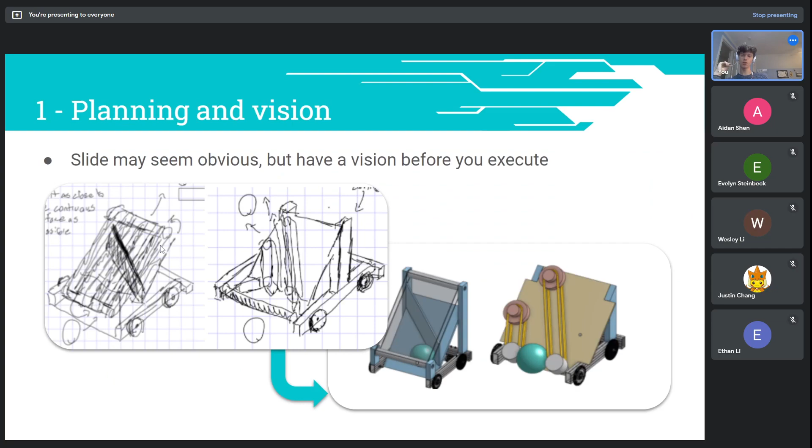This ramp might have been an example of that, although it's really just a rectangle, but it's a rectangle mounted at a really weird angle. You'd need some 3D printed brackets. But overall, you should be checking for design viability and manufacturability. And then you can also rapidly test and iterate lots of designs. So the nice thing about Crayola CAD, it's sort of one step above sketching, where you can crank out an idea really fast.

I've gotten good enough at Crayola CAD that something like this would take me maybe 20, 30 minutes. So you can do that, give it to somebody, and then they have a 3D representation of what they're doing. You have some dimensional constraints. This wheel is 90 millimeters because I knew whatever wheel we used would be 90 millimeters, and I wanted that size to be accurate. The ball's 6 inches. And this drive base is accurate because it was already CADed. All I had to do was delete this front rail, and we were good.

But Crayola CAD can be basic or advanced, and there's a couple steps in it. So this is Crayola CAD for our 2020 online robot, and we had this intake here. This intake would pick up a ball. This red belt would sort the balls, push them forward, and this ramp would hold them. You had to hold 5 balls, and then this shooter shot them out.

You can see here, it's not quite Crayola CAD, but it is concept CAD, where the wheels here are blocky shapes, and these flapper wheels, they're not real parts. And then this motor is just mocked up. It's a rectangular prism in a circle. These plates are clear, so you can see what's going on in there.

There's stages of doing CAD in levels of detail and planning, and you don't always need detail. You could probably manufacture a robot from this. The robot would have a lot of jank to it because it would be mechanical members figuring out stuff on the fly, and that's always going to be janky. But you could also do something off of this, and it would be slightly less janky. And then you could do something off of the real CAD this year, where every bolt, nut, and screw was CADed, and then the robot is actually going to be fairly well put together.

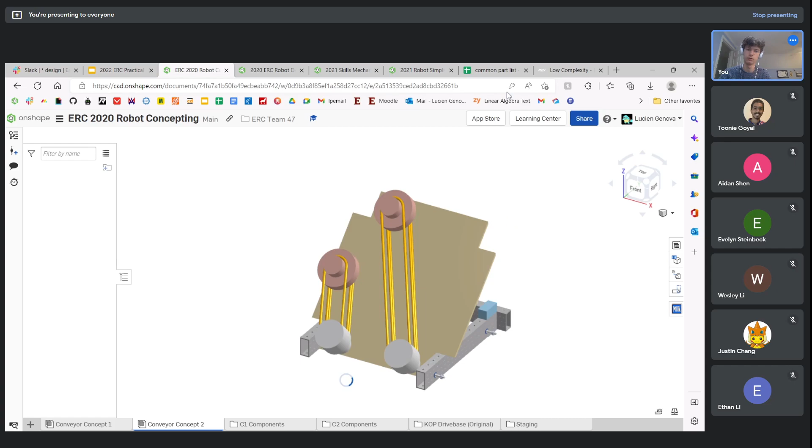Asking for a lot from Onshape right now, but it's doing all right. So you can see here that this is a really simple concept, right? There's like 3 structure parts, these 2x1 tubes, which mount to the side of this plywood board. And in CAD, always, always, always make things the color of the material they're actually going to be. Actually, not always, always, always.

These are blue, but the wood board was very important to me because a big flat piece like this can be made out of several materials. You can make it out of metal or polycarb, but wood was best because it's cheapest and you can screw into the side here, so you don't need like a bracket if you can just put a wood screw straight in here.

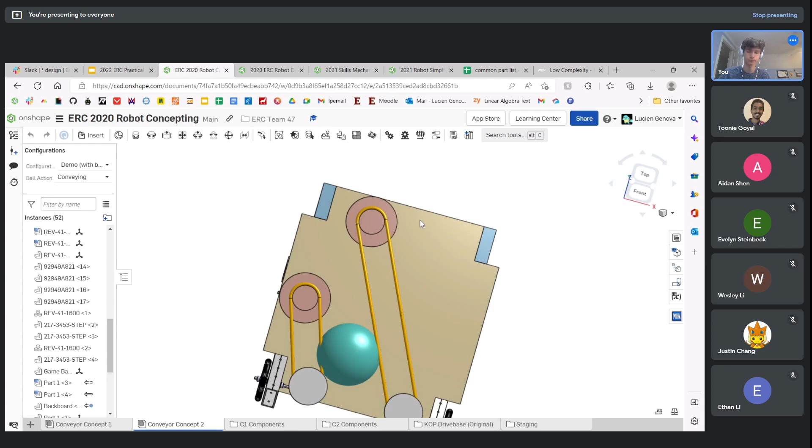And we actually wound up going with thicker plywood on the real design than this, which is just, if I click this here and the back there, this is just 1/4 inch. We wound up going with like 3/8 inch plywood. So we probably could have done 1/4 inch. And this doesn't have any motors in it either. You know, the viability test wasn't that big of a viability test, but I mated this ball to the surface so that it runs up and down the conveyor.

And I actually have a cool little configuration panel where it'll choose the ball action, whether it's intaking, which sets it planar to the floor, whether it's conveying, which sets it planar to this, or whether it's shooting, which puts it on a linear path. You can see the shooting puts it on a linear path that goes out the side. So it only ever goes like this. And then if I put this as intaking, it'll go to the floor. So having easy testing and visualization in your CAD is also important. And this is one of the aspects of that.

You can see with the second conveyor concept, I didn't really do this one as much. This was Kevin and Reese. Can't remember who was working on this. But yeah, the ball comes up. You can see there's a good amount of interference between the ball and the belt, and you want that because the belt is stretchy and compliant, and you want the ball to come up through it.

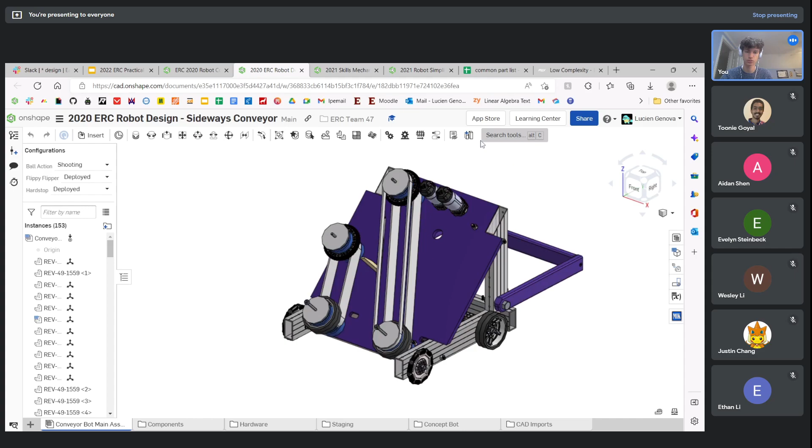Now, if we look at this 2020 ERC robot design, this is the more in-depth version of this Crayola CAD, and you can see that this has all the bells and whistles. I mean, it's got hardware. It's got screws to show you where the main board is held in place right here. See, it's got chains. These motors are bolted to this board, and it's got sprockets on the end of those motor shafts. This is 5mm hex coming out of that motor, and the sprocket is on the end of that.

And you don't need a bearing for this because the motors have internal bearings. Unless the shaft is like super long, then you should support it on the other end with a bearing. But these chains go down to the sprockets that drive. There's one that drives this one, and there's one that drives this one. Now, I figured you could do it with a geared reduction, but there were two things here. I didn't want to waste, or I didn't see the need for another motor slot. You only got 2 additional motors this year. Now it's up to like 3, I think.

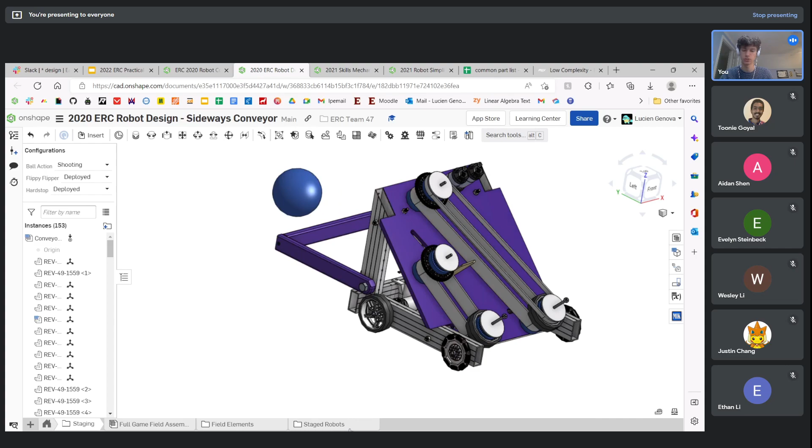But I didn't see the need to use a motor anywhere else, and so I was like, give me more power. It'll make the shooter work better. But also, I figured that tuning the speeds between these two might be useful if you wanted to change where the shot usually went. So we had this hard stop at the back, and that would put us against the wall a certain distance that I calculated the ball would go into the goal. So that distance was like the ball will go into the goal anywhere if it's next to it up to 2 feet away. And you can actually see in the staging, I put the robot on the field, see if this loads.

I put the robot on the field and checked it up against the different game elements. And the field CAD is public, by the way. So I highly encourage you to do this because it's a really, really easy way to check functionality without actually having to build a field. That's what CAD is so good for.

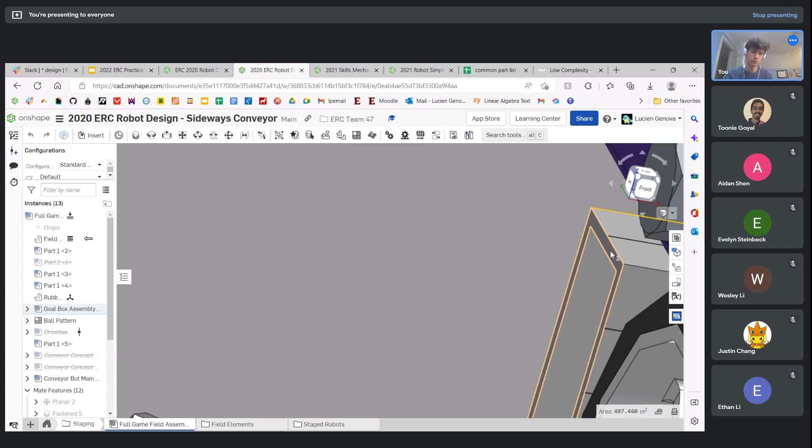You can see there's a back wall here. This goes up against the wall like this, and then this is launched straight from here. You can see that's just about hitting the top there. So I calculated this was the farthest distance it could shoot from, and that distance is 2 feet. Now, I figured it would shoot from farther than this because of the effects of gravity that's going to pull that ball down. So it would wind up hitting the far edge of that circle and not the top.

Oh, and you can also see this one has flappers. They're not properly constrained to the wheel, but you can see this is a bunch of stacked 3D printed parts, and the zip tie just goes in there like that. These flappers were zip ties with weights duct taped to the end of them, and it was super sketchy. Do not get your shins near that. But they did work very well, and it meant that we didn't need a ground intake. For this year's cube, flappers like this may not work because they're heavier and they're not a circle, but I'll let you guys decide that.

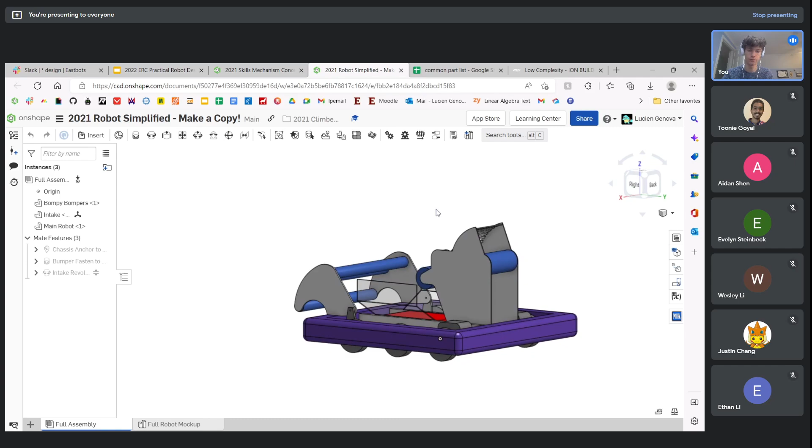And then here's the simplified robot from 2021. You can see we have our shooter and our intake. Drive base gearbox is represented. Now, I'll let you in on a little secret. This Crayola CAD wasn't actually made before the actual robot. The one I'm about to show you was the original concept CAD. This was made afterwards because I wanted a simple platform to build new mechanisms on.

So we were going to maybe do a climber, and I wanted to see where you could fit that climber. I decided if you have two climber tubes, you could fit them here and here. Although that's a little difficult because there are chains here, and I didn't mock up the chains in this mock-up, so you can see there's sometimes a limitation there. But this intake rotated. None of the other big things moved, but it was a good mock-up. And then this looks complex, but if you isolate any subsystem, it's really not that bad.

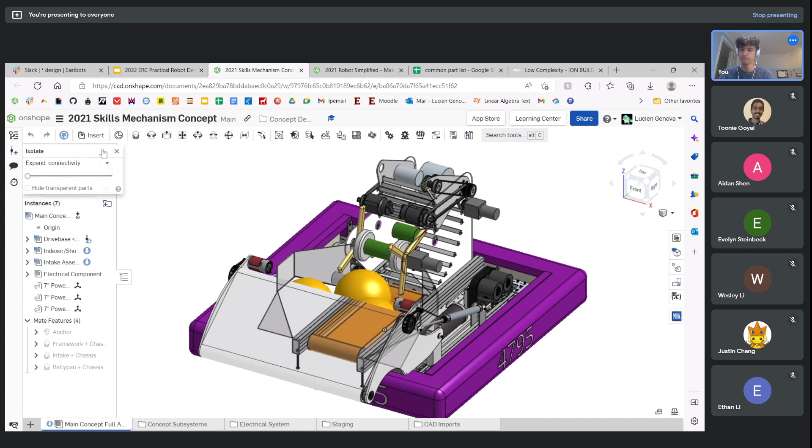Look at the indexer and shooter here. You can see we have this nested rotating hood, and that's just made of two side plates and some shafts. There's actually not even any shafts in here. This wheel was just mocked up as floating because I figured the shafts would be the difficult part. And then you've got these belts that go up here that drive this top wheel, and down here you've got a motor to run the wheel that brings the balls into the shooter, and then there was a motor here to run this conveyor belt.

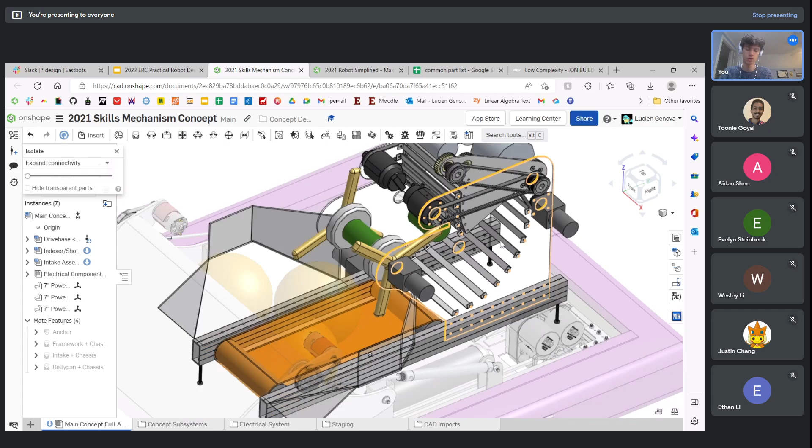And then these parts were a fun part to make. It just looks like that. I figured we were going to make it out of bent polycarbonate, and you can do something interesting in Onshape called sheet metal design, where you design this as a sheet metal part, and it'll generate a flat pattern. So that's the pattern you have to cut out, and it'll tell you what bends to make to make it look like that 3D shape. But explore that on your own. I'm not going to teach it today.

Oh, and you might have heard the story of the 88 rivets that I did. That was for all of these backing plates here. So, does anyone have any questions so far about the Crayola CAD process?

Sweet, okay. So let's go next to the COTS CAD and imports. So I showed you this design here. You can't just get parts anywhere. There's actually a set list of parts that are legal for this activity. Assume that if they're FRC or FTC legal, then they're legal for ERC.

The extreme take is that every nut, bolt, and gusset is represented in CAD. You don't always need that, but it's good to have actual products in your CAD because you have to know how you can machine them, and how they can actually be made and if you can actually make them. So the main site you're going to use for this activity is Rev Robotics. It's what supplies the HD hex motors here. Great little motor, great little gearbox.

West Coast Products works with VexPro a lot, and they develop similar products. They're for FRC mostly, but if you need wheels or tube stock, aluminum tubing, or sheet polycarbonate, West Coast Products and VexPro are great solutions. VexPro also has some motors, but I would encourage y'all to use Rev Robotics motors just because we have those and we're happy to order more. VexPro motors are way more expensive too.

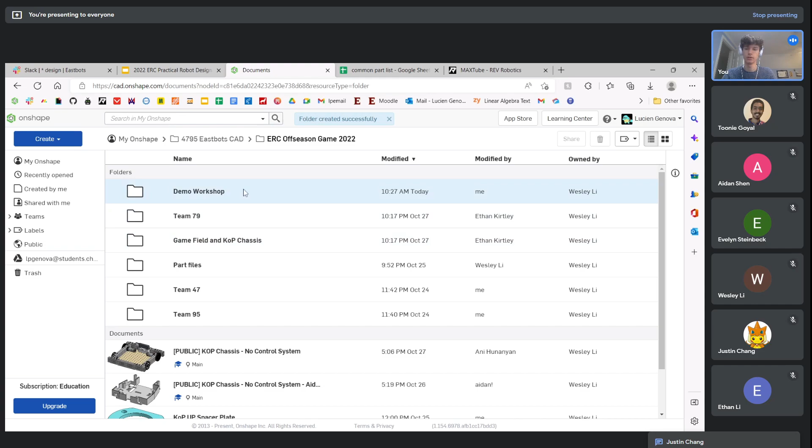I'll make a new folder. Shop. Okay, you all downloaded MKCAD. MKCAD is great. It's mostly FRC parts, which is problematic. Import example. So there's some FTC parts in MKCAD, but it was made for FRC. I think MKCAD was in the curriculum for y'all.

Hold on, I just didn't say what I did. So I'm in a Part Studio here. I'm gonna press this plus and click import. And now I can go in my downloads, select this file, and combine it to a single Part Studio. It's just one part, so that should be fine. But if you're downloading a wheel, sometimes the tread of the wheel and the body of the wheel are 2 parts. So you want to combine it to one Part Studio, because then you can make it a composite part or something, make it easier to work with.

I'm gonna find myself a little wheel here. Let's go with a traction wheel. Actually, no, the 90mm grip wheel looks cooler. So we're gonna do that. And I'm gonna download it. How do you get different imports into one Part Studio? Very simple. I'll show you. So delete all here. Here's our import.

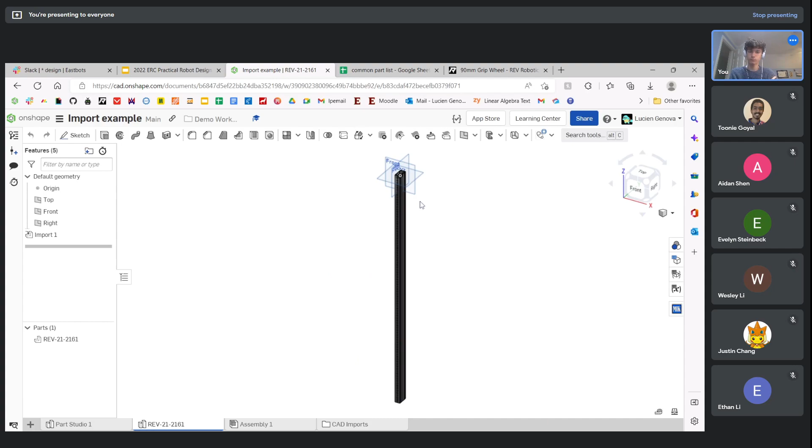Let's cut it down to length. What length do we want this to be? Let's just make this a drive rail. I'm gonna click this face, Shift E to extrude it. Then I'm gonna go remove, up to face, and then offset distance, and that's the length that the tube is gonna be, which will be 13 if it's a side drive rail. And I'll click this face, and it should cut it. There we go. So that's the length I've got here. And I'm going to import my other item here.

You can see it's clearly in my files elsewhere, and this is where I'm going to want to combine it to a single Part Studio because it would just populate a bunch of Part Studios. And also, if you go to CAD imports here, this is the raw file. Onshape has to process that into a real file.

So I'm going to name this Part Studio Rail Mock Up. Let's see, is it importing? We're going to do something called a derived part, and that's how you get other parts into Part Studios. And you can actually derive parts from MKCAD, which we'll do in a second. So derived part is in your part menu down here, in this whole menu.

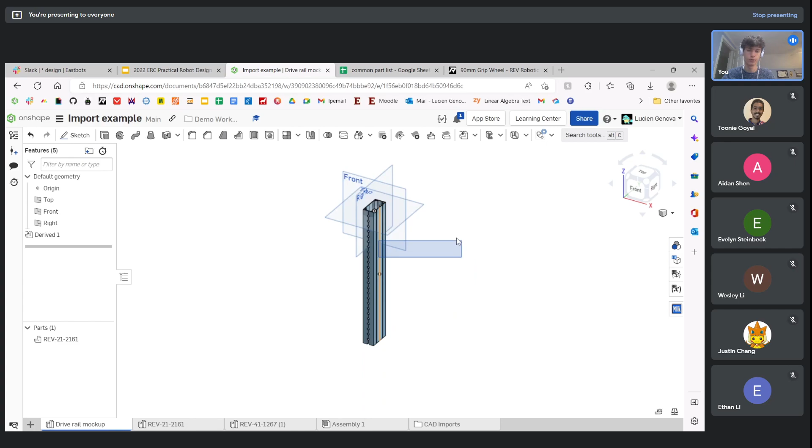It's right here. So I'm going to derive this. Actually, I'll derive both. Yeah, I'll derive this. And that'll bring that in here. And now I have this in here, but look, I can't move it around at all. That's sort of annoying. So I'm going to do something called a transform. If I click on this part, and then I say transform by mate connectors, it's basically a mate.

So I can go ahead and put this on the middle, to be honest. And then I'm going to click the origin, sorry. And that will make it go like this. And I think, yeah, that's about how I want it to be. So that's good. And then you can add offsets to that if you want.

If you go in this transform and you click on the details for each of these mate connectors, I can maybe offset it so that it's 0.5 over, minus 0.5, so that it's centered on the origin. And now I have my part here, and you can see I still can't move it, but it's transformed to a nice place. And I'm going to edit the appearance so that it's silver, because that way you know it's metal. There's no question about it.

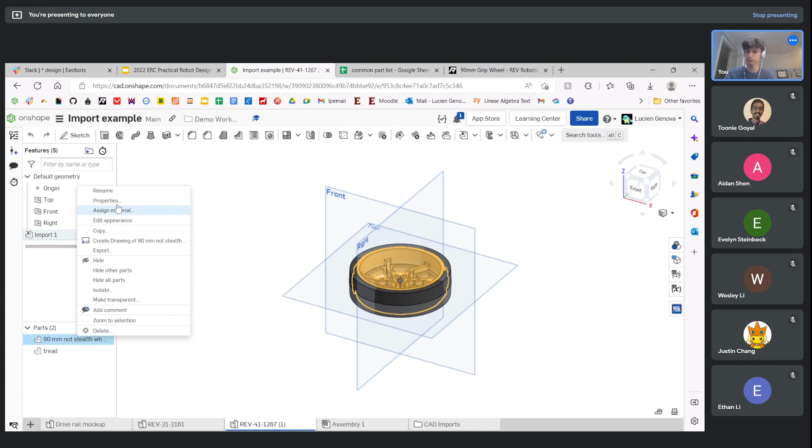Now we got our wheel, and you can see here, what's really interesting is that there's going to be 2 parts at the bottom here. You have your tread, and it's cool because these parts are bonded in real life.

Oh, it's Ryan Huang. It's cool because these parts are bonded in real life, and you can see how they're bonded. So this just has these flaps here, and then this tread is overmolded. Like that, and it just sort of slides in there. You can see it's got these back things. So pretty neat. It's just like the tread material is poured as a liquid around the wheel, and then it sets.

But if I import this into an assembly, it's just two parts, and they're not constrained to one another. So if I do this, it's not really useful, and I don't want to have to click this and group every time I want to make a wheel that works. That's a lot of work, and I shouldn't be expected to do that.

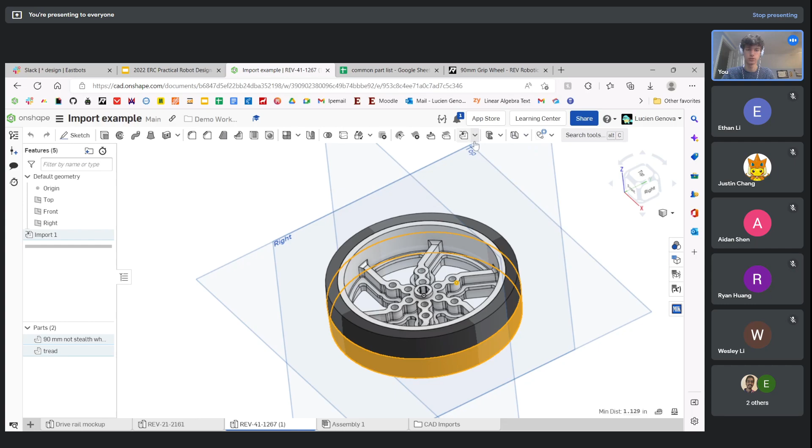So I'm going to click both of these parts. I'm going to click down here. No, it's this one, composite part, and that will just turn them into one part. Boom. And you can have it so that it keeps the old parts if you don't click closed. If you do click closed, it'll maintain everything. And then, well, I got rid of the old things.

I might actually go into this composite part thing here, and I'm gonna unclick close. That way it keeps the old stuff. So this should be still around, but if we go here and we click visibility for composite parts and we drop this down, you can see composite part 1 is right in there.

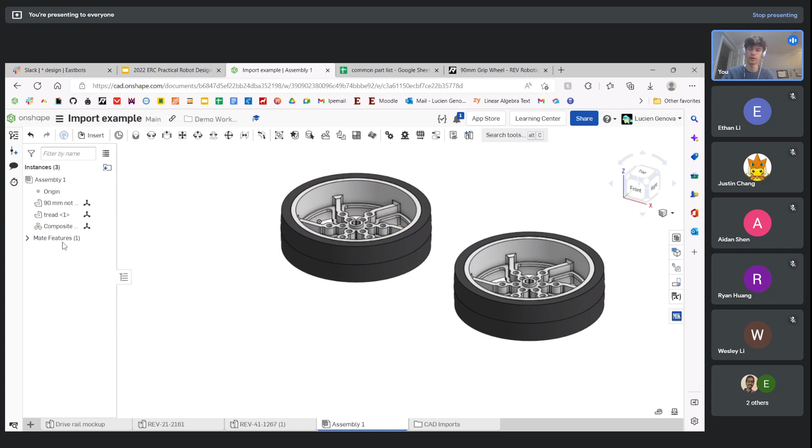And so now this moves on its own. This won't move on its own if I delete group 1 here. Actually, I'll right click it and just press suppress. But this still will. Anyway, maybe I spent too much time demonstrating that, but it's very useful.

So I'm going to make a quick hole in this part. I just clicked Shift S there, N for normal, and I'm going to make myself a little circle. The thing about VersaFrame and MaxTube is that you really want to make a line like this, because if you look, the center that it will snap to is actually one of these edges, and that's not centered. So I'm going to make a point here.

Actually, I'm just going to make a line that goes across, make it a construction line, and I'll just make it super long. I'm going to go down here so it doesn't snap to anything, and then I'm going to click it and press H for horizontal. And then I'm going to make myself a little circle here, on this line. Actually, I'll just make it on the end point here. That's easier to snap to.

Why does it have the grooves? It's so that when you're machining it, you can just punch right into a hole, and it'll make sure that the hole is in the middle, half-inch offset from the right or half-inch offset from the left. So it's a machining aid. Makes CAD more annoying, but it makes machining better, and so that's why we use it.

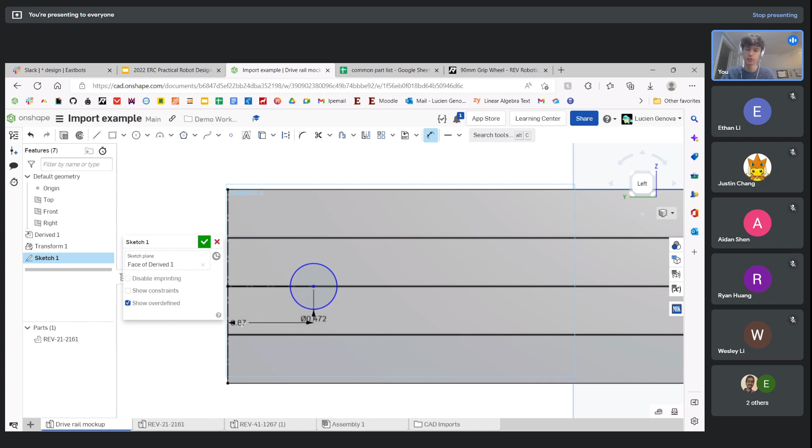And I'm going to dimension this to, did I already say 12 mil? I did. When did I do that? I don't remember doing that. Okay, I'm going to go from the edge here. I'm going to make it just away from the edge, and I'll extrude that. Okay, so there's my hole.

And if we look at this part, let's go back to our slideshow here. This is the same workflow we just went through. Now, this slide initially came from a lesson for FRC design, so it used Vex Pro VersaFrame. You can use VersaFrame for this anyway, but Rev MaxTube is a new product, and it still works. So you can see the full length thing imports, then you cut it down to length, sketch a hole, and cut that hole through it.

And then I actually made this GIF set showing the machining steps you would need to actually achieve this. So you cut it, put it in the vise, run it through with the portaband, that gets it here. And then you mark your hole and you drill it, and that gets it to here. So it's two pretty simple machining steps. It's important to consider the machinability of your parts when you're doing this. Because if you don't have machinable parts, your design can't be executed, and it's very important.

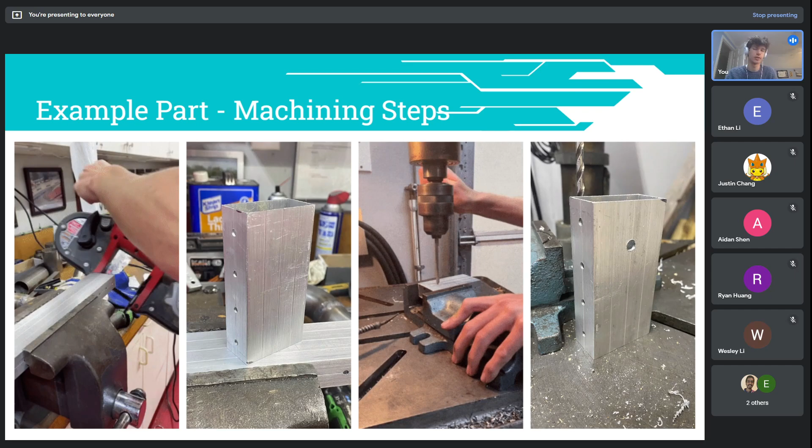So I was going to maybe do a little bit more deriving and importing and stuff, but I feel like you guys get the picture. If I take this into the assembly, I'm going to make a new assembly. Oh, and here's another cool thing. If you have something that you would like to be the face of your document, right click this and say select as document thumbnail, because it just does it randomly if you don't select an explicit one.

And I'll put the parts from drive rail mockup, and I'll put the composite part I had here, composite part 1. I very rarely fix things. I don't know how Wesley showed you to constrain parts. Usually what I do is I'll click some center point, and then I'll click the origin, and I'll do what I call an anchor, where I mate it to the origin. And that way I know where everything is, and I'll just name this anchor. And now this isn't going anywhere.

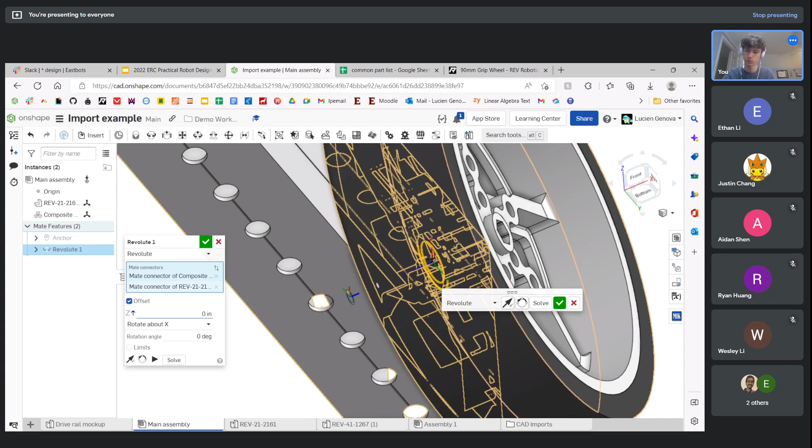And then I'll do a quick little revolute mate, maybe with an offset, this edge here. Other way. It seems like there's a 50% chance you'd get that wrong, but I find it actually happens every time. So at least 75%. And you can see that mates this to here. It's just a very crude example, but I wanted to show some more common practice things. This is probably redundant to what Wesley's already showed you.

Now we get into the design process, and this is one of my favorite slides coming up here, so get ready for it. We have all these things, right? These are the different steps of the design process. And I'm going to talk to you about how CAD interfaces with that. So starting off with the problem, you have to identify specific tasks that you can do. And you guys already did that. That's looking at the game field, deciding what points there are.

And this is, even before you decide what you can do, you decide what you want to do. That's very, very early. This is what you do on kickoff. You do very little of this and mostly this on kickoff, everything that you can possibly do, how matches will play out. And then you decide based on that, what weight do you want to give certain tasks? That's where you make your spreadsheets.

You don't really want to start making sketches here, but you may want to make sketches just to test the viability of certain ideas, because it's impossible to actually think of the difficulty of a task completely agnostic of the difficulty of making a mechanism for that task.

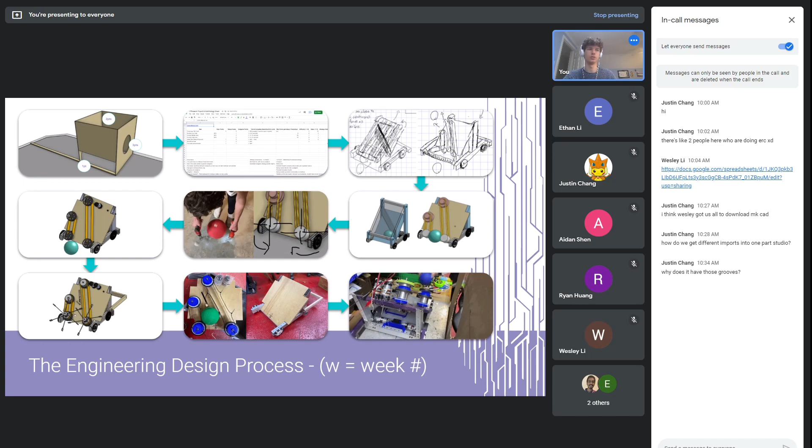Why does it have those grooves? Was that asked just now? No, it wasn't. Sorry, Justin. Oh, I answered that. I did not. Yeah, okay. No questions about this slide.

Okay, sweet. Let's talk about design review. You'll present your ideas to experienced CAD members, and then you'll get some feedback and revisions. We're going to look at a couple things. DFM, which is design for manufacturing. DFA, which is design for assembly. So are all the bolts accessible? Can everything be held together? DFS, which is design for service. That's an offshoot of DFA, which is like if your design breaks, how easy is it to fix?

Because if you're at the competition and you break, that should not be the end of the competition for you. It should not limit what you're going to do for the rest of the event. So design clever ways that you can hot swap things. We also want to do a cost estimate. So is this design going to be wildly over expensive? And then some major optimizations, like removing certain features, adding motors, things like that.

And then minor optimizations, like, okay, this hole looks a little bit too big. Make sure your tolerance is good here for this bolt. You want the hole to be a little bit loose fit, so that it doesn't rub with a shaft, or maybe you want to pick a different wheel. Maybe you want to use a different type of belt. So these are what we'll cover in the design review.

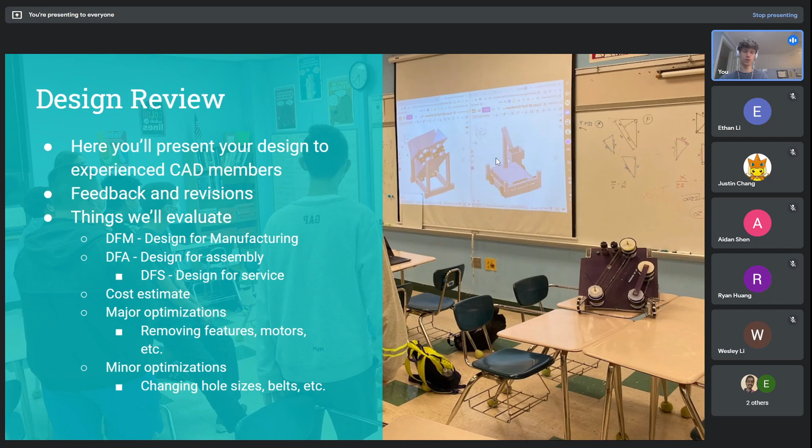And we had this whole thing up on a projector. We had a robot here for reference. It was pretty cool. So now let's talk about the nitty gritty. I've gone through a little bit of this so far, and this is the tail end of the workshop. There's 2 slides left. The nitty gritty is as follows. You have your structure and components, and this is pretty rigid. This is sort of what you have to stick to.

So tube construction, sheet construction, and superstructures and mechanism frames are things I want to talk about. You can't really make anything you want, contrary to popular belief. Your limit is not your imagination, it's what you can buy. Now you can imagine a lot of things based on what you can buy, but these mock-ups here, this was the Team 47 CAD from last year. This was the final CAD.

You can see that it doesn't have full off-the-shelf imports. It didn't need them. The mechanical members were smart enough to figure out, okay, we need 4 bolt holes at the bottom here to bolt it onto the back rail here, and these H-frames here for structural stability need to be bolted through the rear.

So that's great. We're going to look at this robot in a second, and it also has some other cool examples of structure that I want to highlight because it did a very good job making sort of a complex system very frugally. So we're going to look at that. But yeah, you have this 2x1 piece of tubing, and then you can see there's a little hole in here, and that's for a 12mm bearing, which is for 5mm hex shaft.

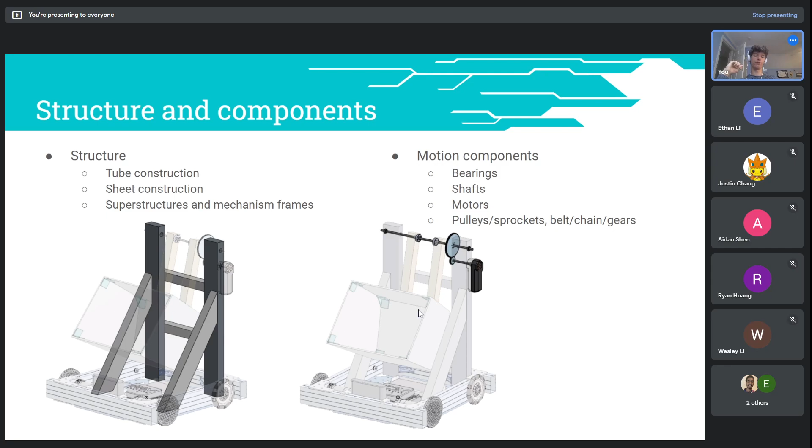So yeah, this motor mounts here, it spins this, which spins this, and then the linear motion is the belt that runs along this. This example is another example of doing work with a motor, right? You have this motor, which is geared down so that this arm spins pretty slowly but very strong, very accurate to position. And then it just rotates this rotary arm. That's another example of doing work with a motor.

That's the end of my slideshow. Do y'all have questions specifically pertaining to your CAD projects? And do you want me to go through a very quick design process of like sketch to CAD?

I think the sketch to CAD would be helpful. Okay. Any other votes for sketch to CAD? Yeah, same. Okay, let me get my sketch pad out. Well, this is actually, I drew this concept during math class the other day. It's for a belt only elevator. And I'm wondering if we should CAD that. Probably not today. But let's go.

I'm going to do a CAD concept for ERC last year. So ERC last year had to actuate a ball. And let's do a pretty simple concept. Set up a document camera here. Let me just join the meeting on my phone pointed at the ground.

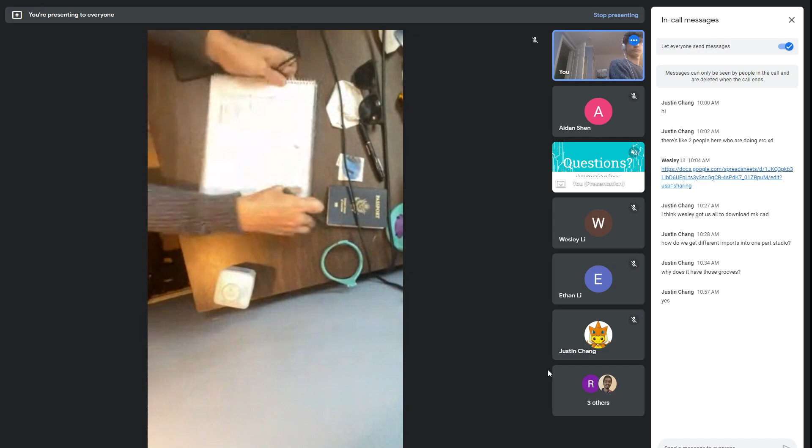We'll keep going with this mechanism concept. If you think about it, the edge of a pulley, like this edge, moves up and down too, and it's not flopping around really that much. A belt is pretty strong, so if we have this pulley, it should be pretty strong.

I'm going to draw a pulley up here, pulley down here, and then I'll do the same on this side. Let's say this is going to be a mid-goal elevator, because you need to do a 2-stage elevator if you're going to go for the high goal. So we're just going to go mid-goal. These pulleys will have a belt that comes off of them. Assume they're the same size; in real life these ones are, but the ones on the right aren't.

Then let's design a little clamping mechanism to clamp onto this, and this center carriage that's going to run up and down. This clamps onto here. You can't see these tiny arrows I'm drawing, but we've got a carriage, and then maybe some kind of very simple intake, like this. I'll just mock that up when we're doing it. Maybe the circles would be on the top and the bottom, and those are wheels.

It's important to also think about where motors might be. Usually when I'm sketching I don't think about motors, but it's sometimes important, especially in a complex scenario. These pulleys have to spin opposite directions, and I think the best way to do that is an infinity belt. Super simple concept, we have it on our robot this year. I think we can put the motor behind this right here. This will be our motor, I just colored it in black.

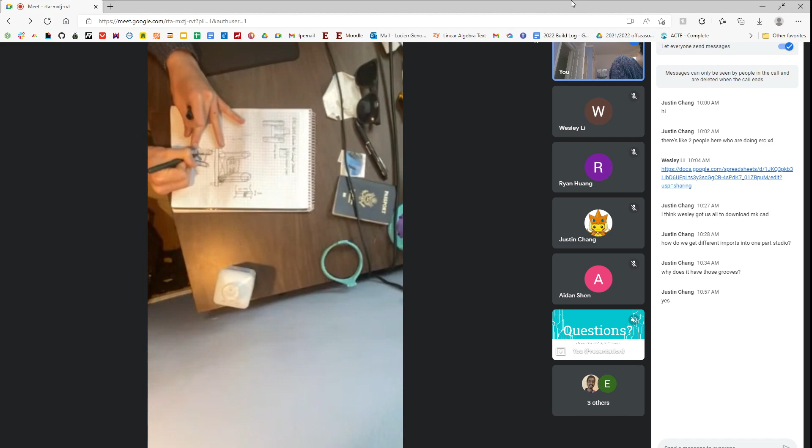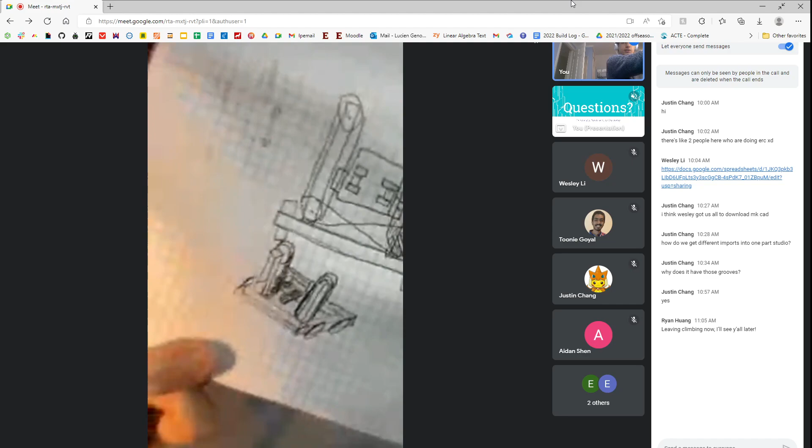I'm going with a wheeled intake because I've been a fan of that since day one. Here I've got my carriage with a wheeled intake on it, and I'll finish this off with a back rail. Our wheels are here and here. I'll do some shading on the fronts of the wheels to give them depth. So that's the robot concept sketch. It may be difficult to see, but it'll be much easier to understand in 3D, so let's do that now.

I'm going to kick this fool from the meeting right now. Actually, I'm just going to unpin his presentation. Okay.

So now it's time for CAD. I've got my import example here. I'm going back to Onshape, demo workshop, elevator example. You guys may not be able to do this; I don't think you will have permission to import from other documents.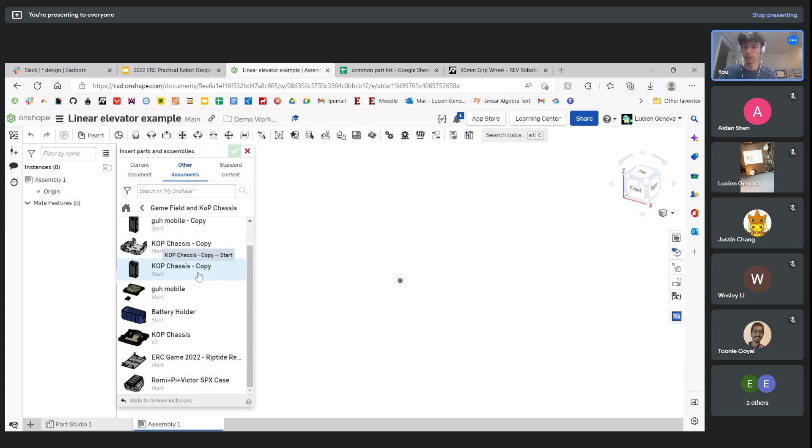You go to My Onshape. This is super useful, but I heard some of you didn't have perms. You'd search game field and KOP chassis, then click KOP chassis. It's been versioned; create a new version every time you want to import it. Then we go to assemblies, and I think it's full assembly.

And we'll wait for this to load for a second. Now the thing about Onshape and multi-document interaction is that with multiple documents, you need to version it every time you make a change in the other document. Okay, so that imported that. Great. I'm going to anchor it because right now it moves around freely.

So we're going to press mate, and I'm just going to use the bottom of the belly pan centered here. And I'm going to click the origin mate connector. And I'm going to call this anchor. So now this won't move around. And then I'm going to name this full assembly. Should have also said full assembly, but you know.

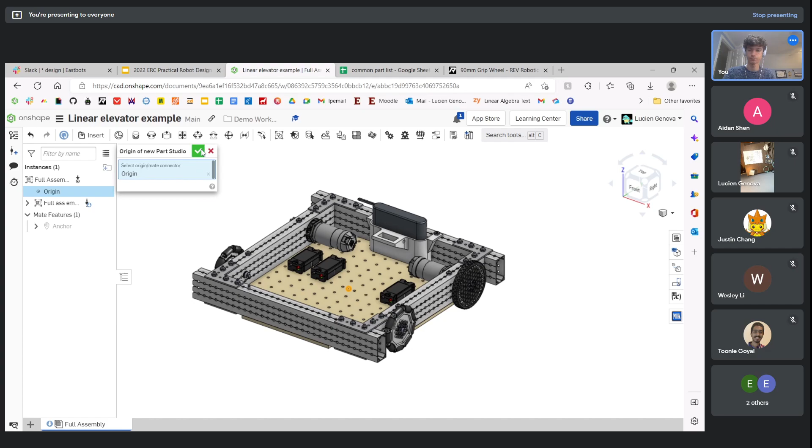And we've got our mechanism. So I'm actually gonna delete this Part Studio. I'm gonna show you something cool. If we go up to the top here and click Create Part Studio in Context, and then we select Origin Mate Connector, it brings us to a new Part Studio that's in the context of the assembly. This is super useful for rapid prototyping.

You have to be careful with context though, because let's say I make a sketch. If I click this and make a sketch on this, and I use my project tool here to bring a bunch of these existing geometries into the sketch. I can bring geometries that are on the plane, or I can actually bring this line here onto there. If I finish that sketch, we have our context, right?

It's in context. But let's say I go to this assembly and I delete that belly pan. All of a sudden, the whole Part Studio breaks. So you have to be very careful when you're doing this because, well, it's great for a demo concept, you want to avoid context when you're doing actual mechanism CAD. I'll say that.

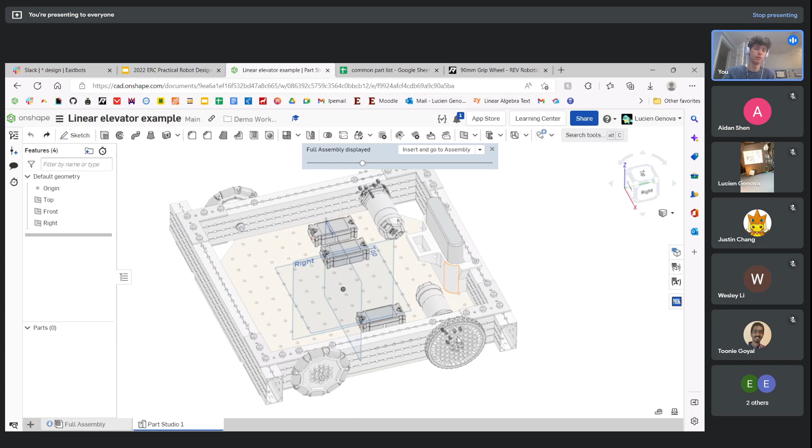So we have our initial. Which side do we want to be the front of the robot? Yeah, we want most of the weight to be over the front two wheels because then it won't wheelie. If we put the elevator over the back two wheels, plus there's less room here, it can drive these so it'll wheelie. Here it'll just slip the front wheels more often. So that's a quick design decision we'll make.

And I can go ahead and just start a sketch here. I'm going to say upright 1. I'm going to name this sketch uprights. Yeah, that is poorly done. And we'll go ahead and project this bit here, right there. And we'll go ahead and make ourselves a 2x1. I clicked G there to make myself a 2x1.

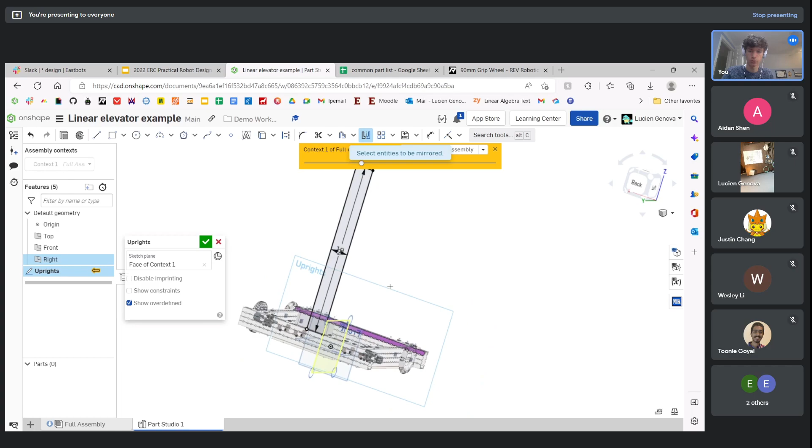And then, how tall should it be? The frame height limit is 20. Let's take off an inch for that, so 19. So now we have our thing here, and I'm going to do some quick sketch prototyping, actually. Hold on, give me 1 second to mirror this. I'm going to mirror it about the middle plane here, and I'm just going to select all here. I'll click this and this too. Okay.

Now let's make ourselves a little rectangle here, and let's constrain the height of this. Hold on, I'm going to make this a construction geometry. Just pressing Q and G does the trick there. And then I'm going to make this like 4 inches tall. If you think about it, the taller this is, the more stable it will be on the belts, but also the less travel you have because you reach the top sooner. Right, so we can play with that.

And this can move up and down in the sketch here. And I want to represent our goal. How high is the goal? Do any of you guys know off the top of your head how high the mid goal is? 10 inches. Is it? Yes, 10 inches. And high is 20. Okay, sounds good. So we're gonna make ourselves another quick thing here.

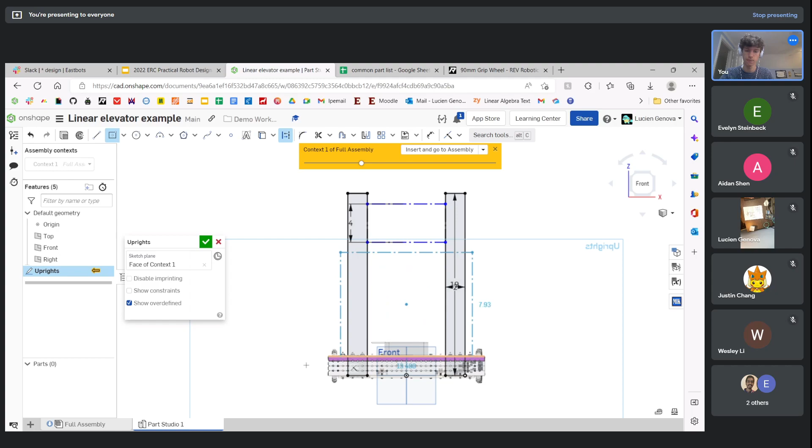And I'm going to dimension it from the origin at the bottom so that it's on the ground where the wheels are. And sketch prototyping like this is also a very good way to, see, it's like 0.75 if I recall correctly. Something like that, yeah, okay. And 10 inches tall.

So what I'm seeing here is that we honestly don't need all this reach, although it might be nice if we're stacking later. So I think probably 4 inches is fine. We might even want to go up to 5 or 6. Or we could do little extensions here. But this was just to test the viability of this geometry and see, okay, can we make these shorter?

Maybe we make them both 18. Or maybe we make them 16. Right? And then that can still reach here. It can still dump into the box. Just going to dimension the bottom here. It's bothering me. I think it's 24 wide.

But I think we'll just make it 19 because not going right up to the frame height limit gives you some room to breathe. And let's do a quick dimension here. This from the bottom of the floor here is 19.75. That's going to become a driven dimension, 19.75. And that tells you the legality. So if we go 18 here, it's 18.75.

The tallest we could do is 19.25. But we don't want to push it that much, really, because you would hate to get called at inspection because of something like that. You want to optimize, but you don't want to give yourself future risks. So I'm happy with the way this driven dimension is right now.

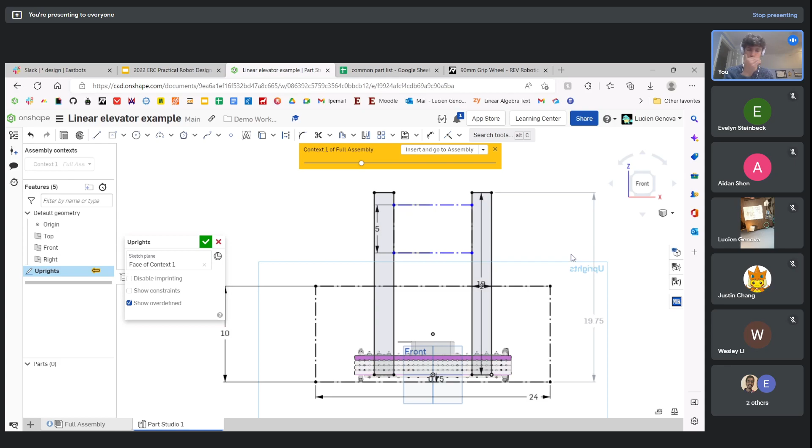So because we have done all these sketch prototyping components as construction lines, the only things that we're actually going to extrude here, if I just press extrude, it'll extrude the 2x1, and it automatically goes to 1 inch. Awesome, amazing. We have our uprights. So the next part is going to be the pulleys.

Now, I think, yeah, we'll need to. So there's a bit of a crossroads we're at here. I think we can do a pulley here up top. We always want a pulley up top at the very highest point, and then we could either do a pulley at the bottom above the rail or a pulley through the rail. Because the thing is that when you do a pulley,

I'm going to screenshot this and draw on it a little bit. So I'm going to stop the screen share and share my entire screen. Let me share my entire screen here, and we'll do some drawing on this.

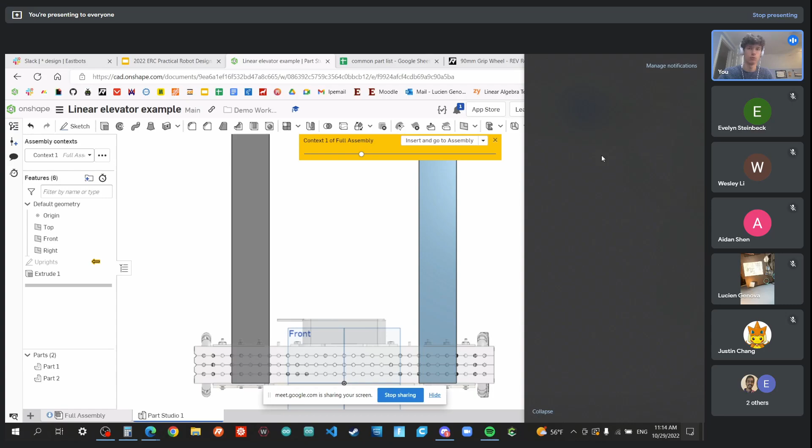So if we have a pulley here like this, right? If it's just touching the bottom, the only usable part is like right here. And that limits our ability to go down quite a bit. And we want to go pretty far down because we want to reach the ground where the cubes are. Right? The cubes are on the ground. They look like this-ish. I'm going to erase that. So maybe we want to move the pulley down here so that it's almost at the bottom.

But then you come to a bit of a trade-off of like, okay, can you actually take that apart? For machining this, you have to machine 2 holes through tubing instead of 1. The reason I picked aluminum 2x1 for this, by the way, is that it needs to be stiff, it needs to be dimensionally accurate, and it needs to be easily manufacturable, and 2x1 does all 3 of those.

If you did wood, it might be floppy and it might be unstable. If these belts are moving relative to each other, the mechanism might not slide up and down so easily. And if it gets hit, you don't want it to snap in half. This is your critical structure. We may even wind up adding some components to support that structure. But yeah, so do we do a pulley here or not?

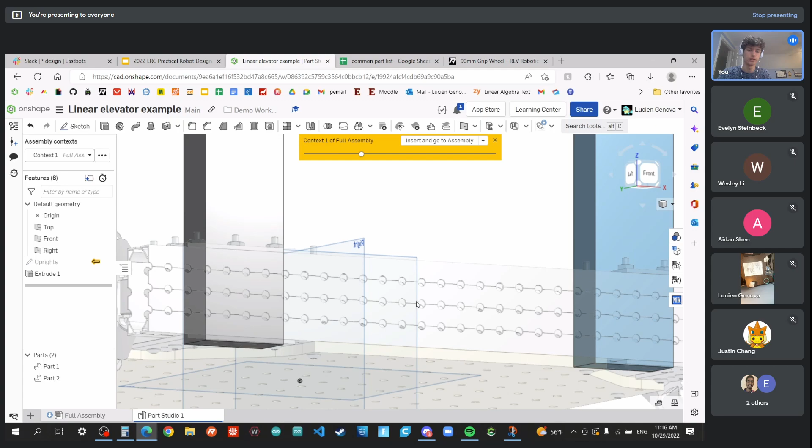Or alternatively, we could do something entirely different. We could delete this front rail here, and we could do just bolting these to the sides, and then have the thing be on the front, and that way the intake can come all the way to the ground. I don't know that that's necessary though, because the cubes are 6 inches tall. I'm gonna go and mock that cube up. Actually, I'm just gonna give myself a mock-up cube.

Let's go ahead and... Did I say something about the back of the uprights? What did I say? No, I'm asking, couldn't you just move the pulleys to the back of the uprights? Yes, but that's where I've always intended them to be. Oh, okay, I thought they're on the front. What I'm saying is that your intake can go down lower because it's sticking out. It has to stick out. Your intake can go down lower if this front rail doesn't exist.

I'm going to offset this plane. It was 0.25, we said the ground plane was, and I'm going to name this ground plane. And I think it needs to go the other way.

And this is where I'm going to sketch the cube. I'm going to drag this out here.

Whoa there, buddy. Someone's not happy about my existence today. God damn it.

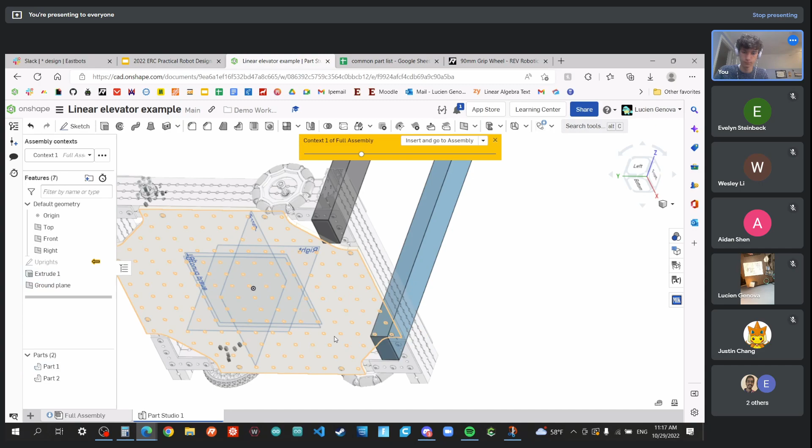There we go. Sweet. So I'm going to make that ground plane wider just so I can see it. And I'm going to sketch on it. I'm going to make a quick little cubey. Drag it out from here. I'm going to make it 6 by 6. And then I'm going to extrude it up to 6 inches. Oops. There we go. There's a little cube.

So I don't think we'll need to have our front rail delete because it looks like we can just grab onto the top of the cube with whatever intake we have. So I'm going to go ahead and hide this part. And now I'm going to start making our pulleys. And this is Crayola CAD, so it doesn't need to be super advanced.

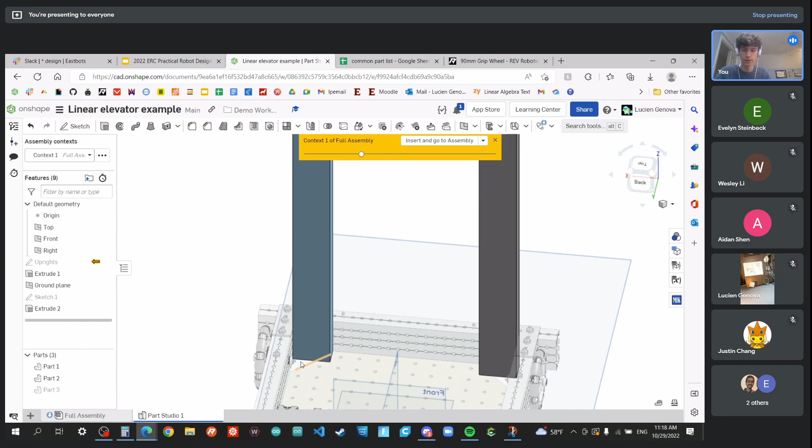I'm going to make a 5mm hex hole. And I'm going to put that 1/2 inch up so that it's halfway through the front rail. Or sorry, 1 inch up because the front rail is 2 by 1. And we can honestly mirror that feature across the center plane here. And then let's look on Rev here. Let's see what sort of 5mm hex pulleys they have.

Let's see, just if we look up pulley. Bad typer. Okay, we got round belt pulleys. This is probably what we're going to want right here. That's the money. And then we've got our belts, and we'll use FRC belt calculator in a second here. So this is a GT2 pulley, and we have our 12, 24, 30, 36, 48, and 60. And we'll want to use the same two, and we'll probably want to use a pretty big one.

So I might wind up downloading and importing the, let's see, let's play it by ear. I'm going to make another circle up here. And I'm going to start speed running because I don't want to waste y'all's time. But if you do want me to slow down and show anything, then tell me. Okay, so now we have our holes.

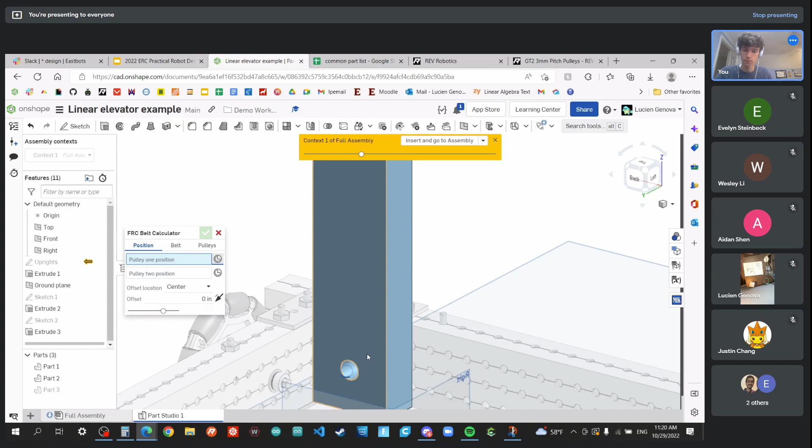I'm going to use FRC belt calculator, which is a feature script I have, by the way. If you want to add feature scripts, click over here and click add custom features. All right, now pulley 1 position is going to be this one. And pulley 2 position is going to be up here. And we'll see if there's even a belt that's this tall.

Yeah, so 180 tooth seems to be the longest one you can get. We may wind up having to do chain here. And chain will probably also still work, to be honest. With HTD, we can get all the way up there with HTD belts. So we may want to just choose that. But 200 tooth belt, I mean, that's expensive. This is a 180 tooth GT2, and that's $10 for a belt. But you get HTD belts from Vex.

I'm gonna search that up. See what we get. Here we go. HTD timing belts. So 250 tooth is the longest they have, and that's really big. But okay, 200 tooth is $15. That's not terrible. You just have to remember that 2 of those is $30. You're spending half your budget on belts.

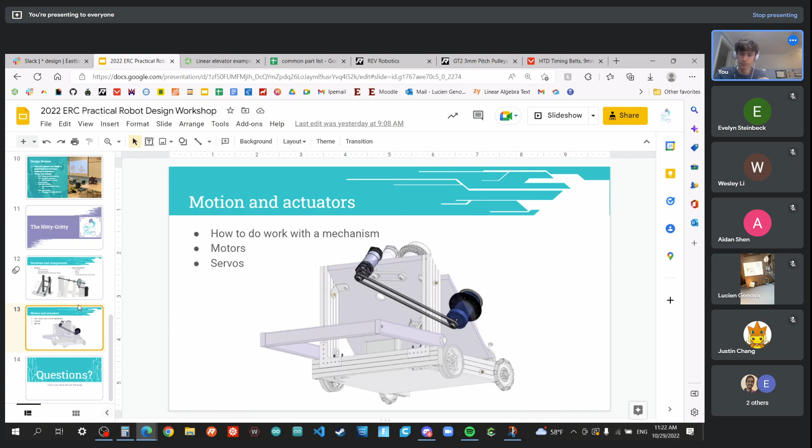But if we look up here, and also you may want to consider that you can't use these 5mm hex pulleys if we're doing HTD because that's a different tooth profile than GT2. And if there's no GT2 belt, then we'll have to find either an insert that adapts 5mm hex, or we have to do a printed part with a bolt circle or something. But we have those inserts, remember, this one right here, those locking inserts may work. I'm not going to get that detailed in the CAD today.

Let's see, 200 tooth belt, it's pretty close. What if we go with the next smallest belt? Okay, that's a little smaller, 180. What's the cost of the 180 tooth belt?

$13.99. Save ourselves $2. I think that's worth it. Is it worth it? Yeah, it's totally worth it. Okay. And I'm going to copy this value here. And I'm also going to have it make 2 pulleys. So I'm going to say custom pulley and custom pulley. And then it'll generate those pulleys.

And if I offset it by like 1, go ahead and offset it by less than that. 0.5 should do the trick. Yeah, so that's great. And we copy pasted that value, so you can see this is red right now because the holes that we told it aren't the same length as the holes that were there.

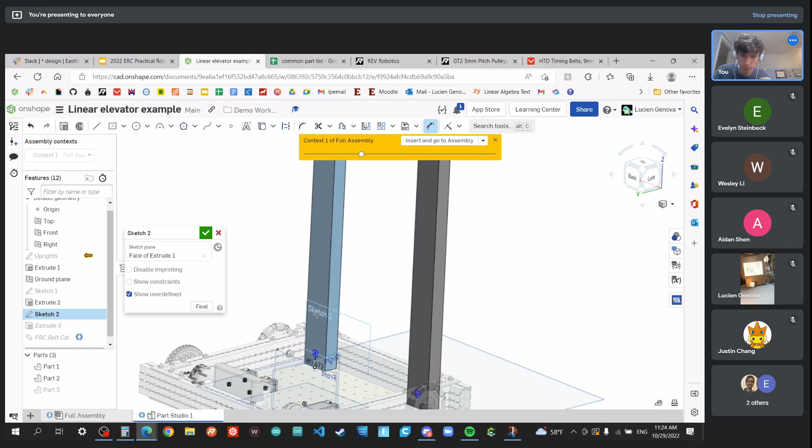So I'm going to delete this dimension here. I'm going to dimension this hole to this hole. I'm going to paste in 15.354, which was the value that the belt calculator gave me. And that'll go apply to the other side because I mirrored everything. And now you can see that we've got this. Fantastic. I'm going to hide these mate connectors because they're annoying me.

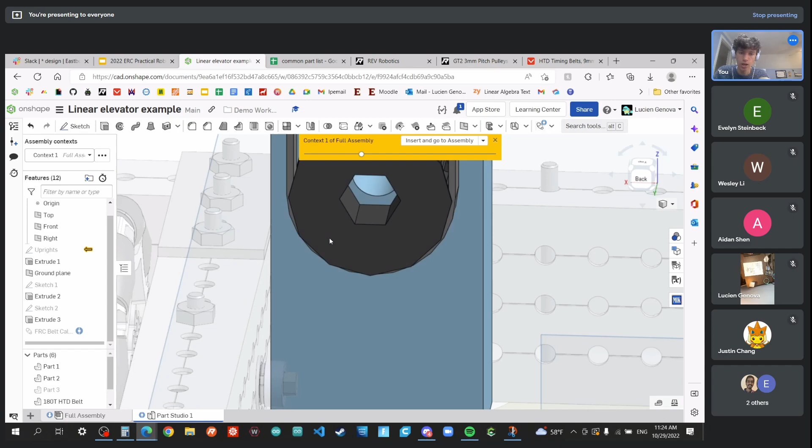Actually, it's not quite perfect, is it? Oh, because I clicked next smallest belt. So we got to go closest belt again, and then it'll rectify. Okay, sweet. I'm going to hide this. So now we've got our belts and pulleys. You can see this is a 5mm hex shaft. I'm going to click this, and I'm going to make it bright cyan because that's the printed part appearance, and I don't want to forget that these are 3D printed parts.

In addition to that, I'm going to go back here, and I'm going to say enable belt teeth because I think we're probably going to wind up creating a device that goes into those belt teeth. Let's think about this. We may wind up wanting to have this belt go farther than the side. So that's worth thinking about. You would need bigger pulleys and a longer belt. I think we can probably still clamp it on without doing that. It'll just be a little bit different.

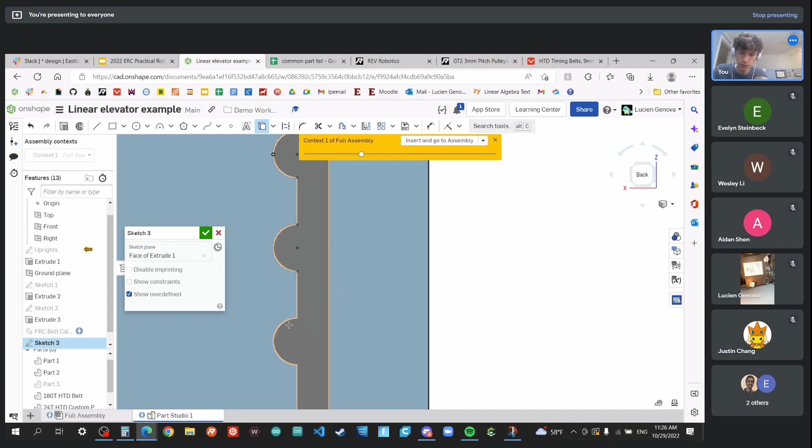So I'm going to quick design a little clamping block that we'll just clamp onto here. We'll do a square here. And then I'm going to copy a bunch of these tooth profiles. And hopefully this block will just slide onto the belt. And this is a very arbitrary thing. I'm just Crayola CADing this. This is levels of detail that you don't always need in Crayola CAD.

And I'm going to make this distance from here to here 0.25, and this height, I'll make it 1 inch. Okay, and then I'm going to dimension this. Let's see. I'm going to project this onto the sketch in construction form. I'm going to dimension the center of this circle to this just because I don't like blue stuff, and blue stuff is annoying. There we go. And that gives me that profile. I'm pretty happy with that.

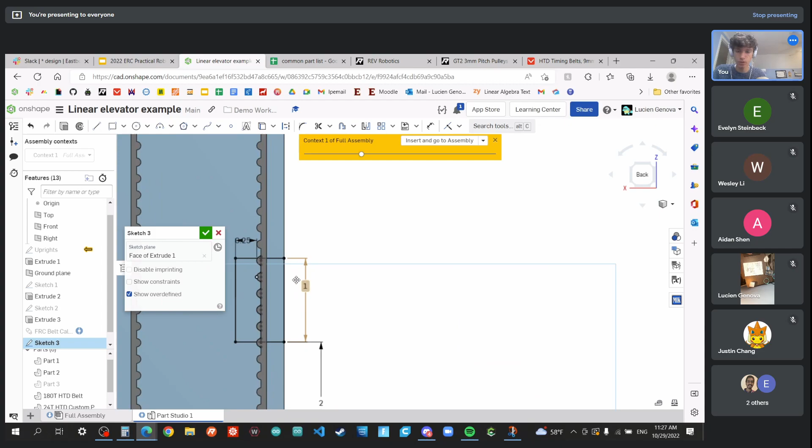And then this will be a 3D printed part or something. So tell you what, this is a very arbitrary design, but I'd probably spend more time doing this in a clever way if I was doing it... this is only 1 inch tall, isn't it? We can make this 2 inches tall. And I want this to be like a tube plug, so I want it to go in the end of a tube.

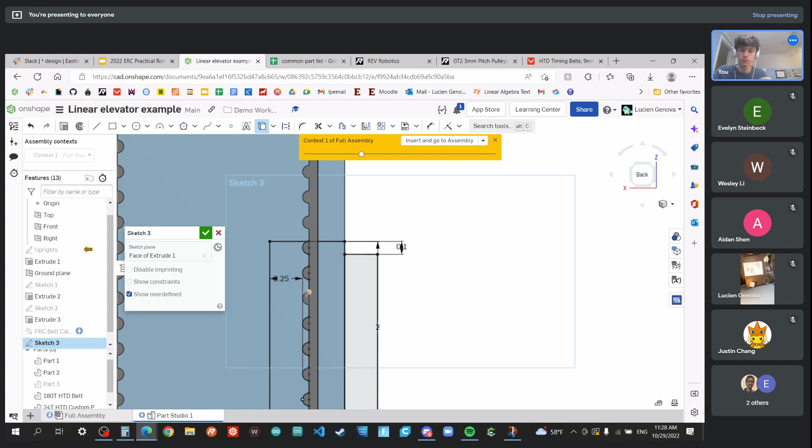And then I'm just going to select this whole thing. And it should project. Come on. It decided it didn't want to. Okay, and I'll extend my line. I don't know where I did my line, but I'm just going to draw it again. Okay, and now I can extrude this. It's going to be really weird. Let's see what it does. Okay, so I must have projected the outside at some point. I'm just going to delete this because the whole thing was projected.

Ah, you know what it did? It did that. Okay, that's weird. Can I just click that? I'm going to click this. You know what? I didn't have a projection of this line here. Oh, I clicked the wrong feature.

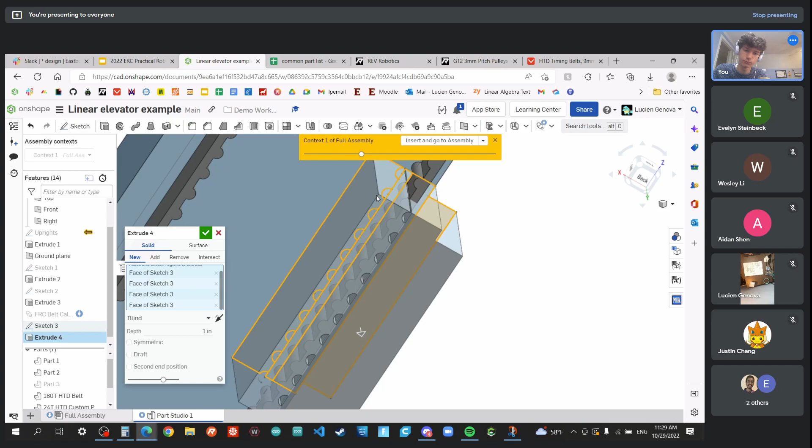Okay, sweet. I'm going to extrude these two and this. I'm going to extrude all of these up to this face here. And then I'll extrude them even further, the size I want. You wouldn't be gluing it. It would be two parts, and they're clamped together. So this will bolt together. Sorry if my concept isn't coming across very well. Just doing it very quickly.

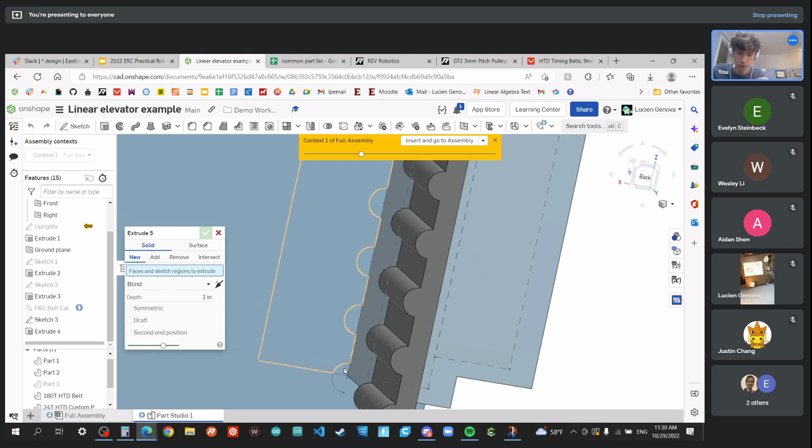Yeah, the idea is to have it be a clamping plate. I'm going to continue showing this. I will have to extrude this, and I'm going to just click every single one of these. It's going to be annoying, but I'll make it happen. And this isn't the way I did the sketch. Sometimes that's just the way it is. Add it to this part, and we're going to go up to the same face.

And now we have ourselves a base block, and then we'll make, so the belt is actually just going to slide in here. So I'm going to leave the negative of the belt. I'm going to hide this part. We're going to leave the negative of the belt. So if I extrude this, and extrude it, that seems pretty good. And then we'll add it to this part here.

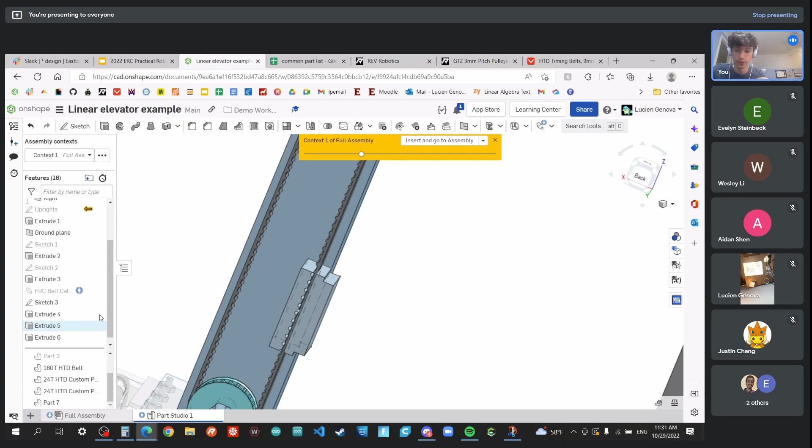So the belt should just slide in here, and if the tolerances are right, which they're definitely not right now, you would need to probably print this and then retry it in order to get the tolerances right. It would sort of work out. And this is going to be a 3D printed part as well. And then I extruded it 1 inch out.

I'm just going to do a quick little offset on these faces here, making a construction line to mirror it across. And I'm going to go 0.1 here. And that's going to be to remove this so that it's actually a little tube plug. There we go. Okay, there we go. And now we're going to extrude this, remove. Okay, now we have our tube plug.

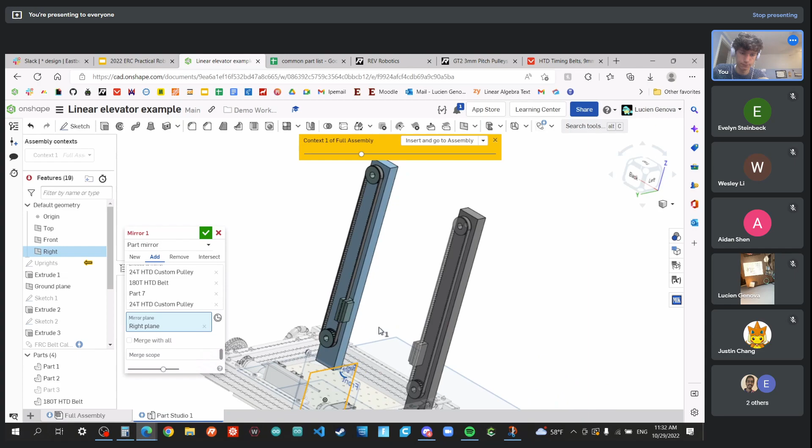I'm actually going to extrude this. I'm going to mirror this tube plug and this belted pulley across the main plane here. Entities to mirror: this, this, this, and this. And you could honestly have just done one upright to start with and mirrored it across that. And I'm going to click the right plane here. And that'll give me another set of parts. And we'll make those new.

And check this out. This carriage. Actually, you know what? I don't even need to make a sketch here. I'll mock up the 2x1 tubing like this. And I'll go up to this face here. New part like that. Boom, 2x1 tubing. And this is sort of our carriage. Let's go ahead and make ourselves a little mechanism here to act as our intake mechanism. I'm going to make it on the bottom of this.

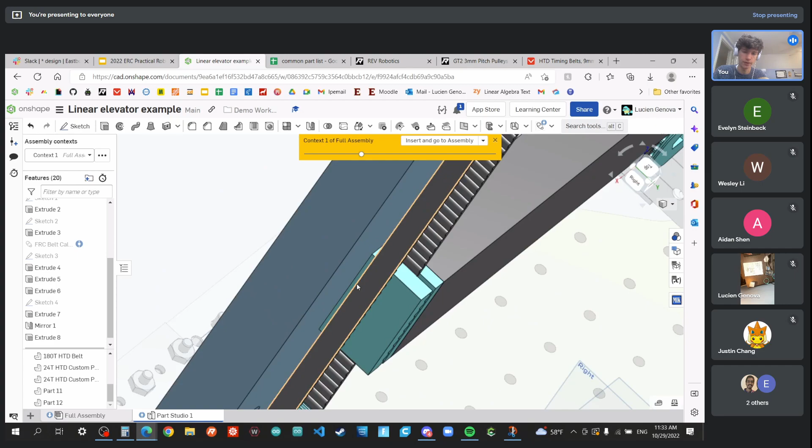And probably for the carriage, you'd want to have like 2 of these. So we could do a, yeah, let's do that. You could always just make these parts really tall, you know, so that it really meshes on there. And then also this is sliding against the 2x1 metal. So it would be sort of a rough action, but I'm going to make this aluminum colored. It'd be sort of rough sliding.

You got to go in? All right. See ya. Yeah, thank you. Yeah.

So I'm going to make the intake really quick, and then we'll be done with this. I'm going to unhide our cube here. We have it right there. And I'm going to, again, make this out of maybe 1x1 tubing. Not 1 inch long. We'll have to make it like, it's a 12-inch extension limit, right? So we'll make it like that, sort of.

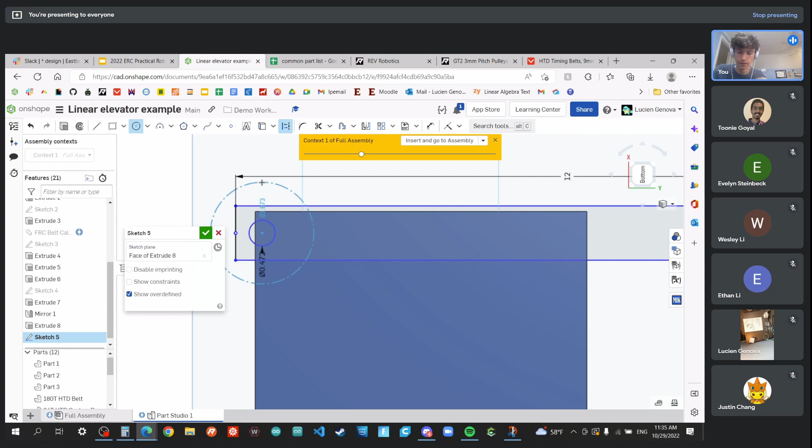I'm going to dimension it. I'm gonna put a point here. Actually, I'll just do a circle. And I'm gonna make a big construction circle that is like 2 inches. And that'll give me a mock-up of a wheel, because I don't want to do it based on where the tube is, I want to do it based on where the wheel would be. But this 12mm hole is for a bearing here.

And then I can go ahead and dimension the edge of this. Actually, I'm just going to mirror it first. You use mirrors a lot. It's super, super useful, because a lot of the stuff you make is going to be symmetrical.

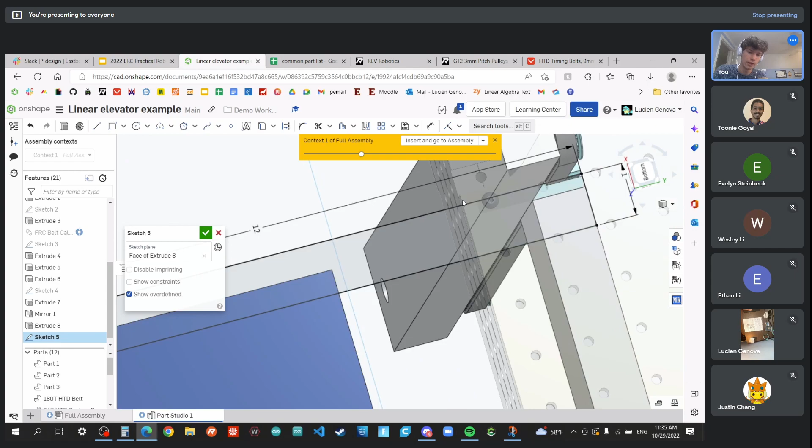So this should be 5.5, let's say. We want to give them a little bit of compression. And you can see that that's just about rubbing through here. So we may wind up needing to do like a step where it goes offset there. And that might wind up making it more of a candidate for plywood, potentially, because we can do a different geometry with that.

So let's go ahead and just say, you know what, this is, I'm going to make this shorter, by the way. I'm going to make this like 10. It doesn't need to be 12 inches long. And I'm just going to make this a line here. This is going to give us a lot of freedom, actually, this decision to make it plywood. I'm going to dimension this like 5 inches from here, so it can really suck the cube in.

Toonie's gone. If y'all are getting bored, tell me and I'll stop, but you did request this, so.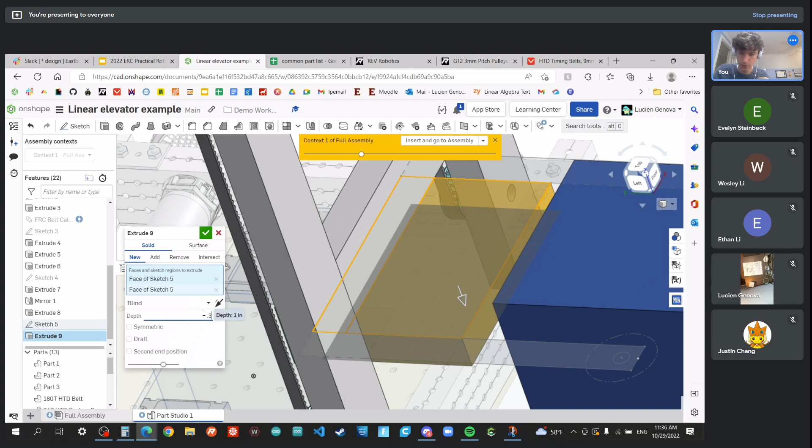I'm gonna make it 3/8 thick because plywood is, it's a good thickness for it to be. And this is sort of a part that I would say like in a design review, like, oh, you shouldn't do this, it's gonna break. So keep that in mind.

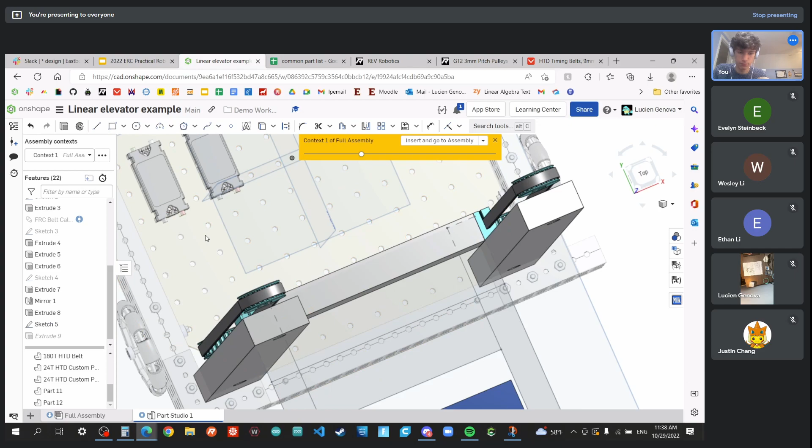Let's see. I'm gonna do another line here. Working in the context is sometimes hard because you can miss certain stuff. Say, okay, there we go. Or sometimes it's hard to navigate to exactly what you want to see. I'm gonna just dimension this a pretty arbitrary distance away, and I'll add a chamfer or something later for strength. Sweet. Okay, there's our part.

And we'll make ourselves, oh, we can add the wheels from MKCAD or something. So this is our elevator. And this was all made in one part studio. I'm going to insert all of these parts into our main assembly. Wants me to select stuff to insert. I guess that wasn't. There we go. So now we're in our assembly. Everything's there. You'll notice though that nothing is constrained or dimensioned. This is for a Crayola CAD.

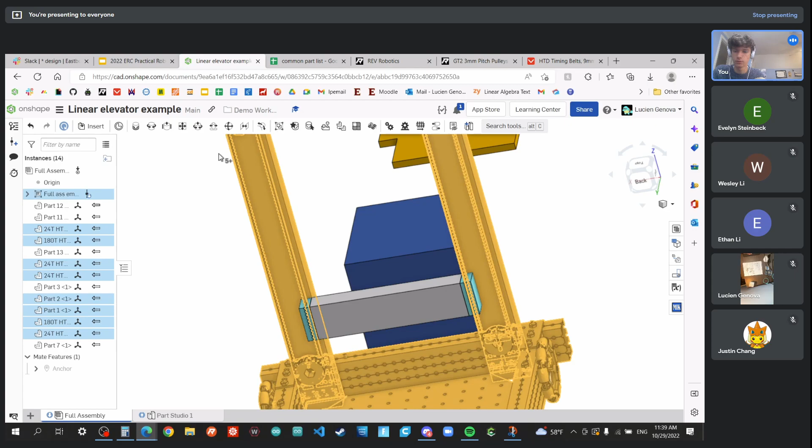I'm just going to group everything. I'll just click from here. So boom, boom, boom. This and this and this. And I'm going to pick one item from the drive base to group it to. That way it just stays in place. And grouping isn't a super great solution, but now it doesn't move. So we take those. And I'll also group this. I'll call this carriage group.

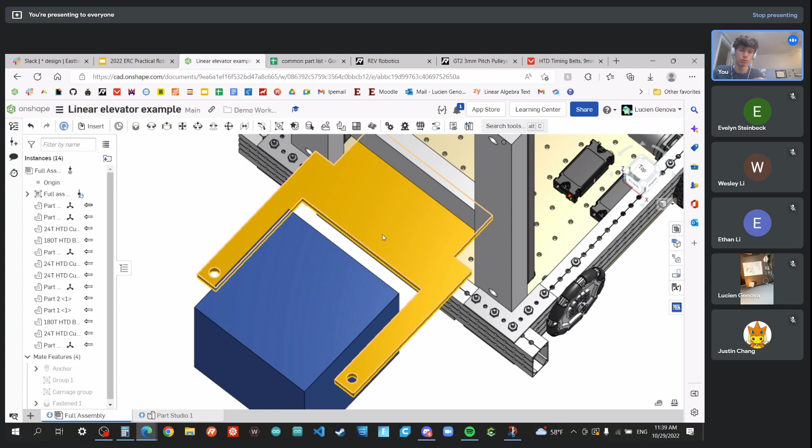I'm going to mate that plywood gripper onto here. Now you probably could have made that out of aluminum, and it may or may not work out of plywood. This is something that you'd have to get a feel for in real life. And you'd also need a place to put a motor on this. So I think you'd probably want to put the motor somewhere around here and then run a chain or a belt and then some sort of way to invert it. But now we have this.

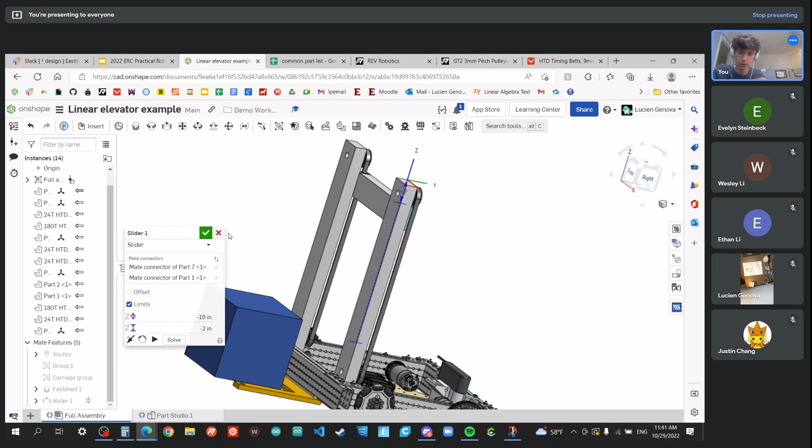Okay, and let's see what the limits. Okay, that's too far down that it can go. So just gonna go in the slider here. I'm gonna set the limits back to what we want, maybe like 14. Let's try conservatively. You can actually animate the degrees of freedom here. Let's see how far down it goes. That's pretty good. Okay. Oh, there we go. So it can go up to there, down too far. Let's go like -12.

Oh, it must have not corrected. We'll go 2 inches further down. We can support that. Sweet. Okay. So this is our mechanism. Now we need a motor to drive one of these and some sort of modified pulley to, going to make that 13.5. Give ourselves a little bit more clearance.

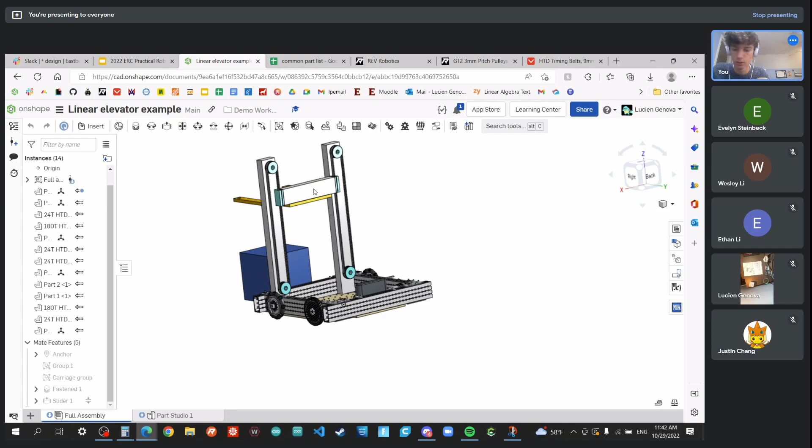And we need some sort of modified pulley to give ourselves that infinity belt that we wanted. I might make that really quick. You can see we're not in the context anymore. If we ever want to go back into the context, you just do this. But I'll make ourselves a little, honestly, I'm just going to extrude this outwards.

And then we can go ahead and, what's the best way to add a revolve feature to this, like a groove in it? We probably want to make a plane. Yeah, I want to make a plane offset from this, because I know this is 1/2 inch, and I'm going to offset at 0.25. And that's the center plane. I'm going to make a sketch on that plane.

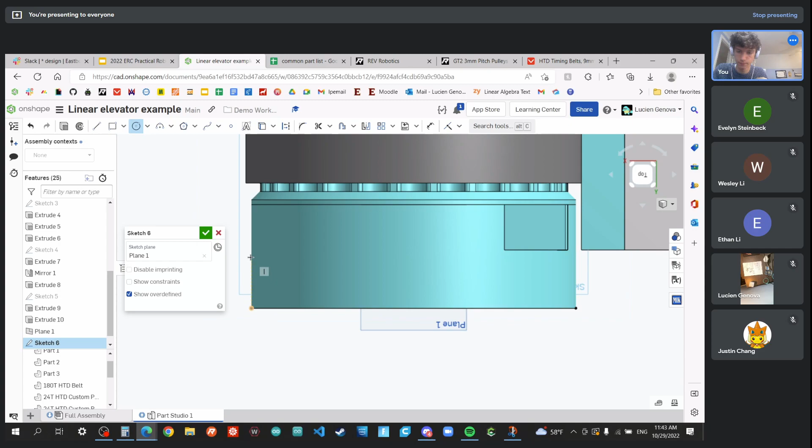I'll project this onto the sketch, make ourselves a little circle here. And our poly belt here is going to be like, yeah, something like that. Okay. And then make that 0.25 away. We'll mirror it across this middle line here. Actually, you don't even need to mirror it. You just need an axis to rotate it about. Make that vertical. And then we'll go ahead and revolve this. Remove, revolve axis, this, merge scope. That's brilliant. Okay, now we have ourselves a little pulley.

And we can mirror those features. So if you click feature mirror here, because we already mirrored the part, we don't want to have to do that. So I'm just going to click revolve, sketch, and plane. And the mirror plane is the middle here. And should work. Oh, we need this extrude too.

I'll tell you what. This extrude doesn't need to be mirrored as long as we just go back into this extrude and we also select this face to extrude outwards. We've got to update the merge scope so it merges with all, and we got to update the merge scope of this revolve as well so that it hits that. Boom.

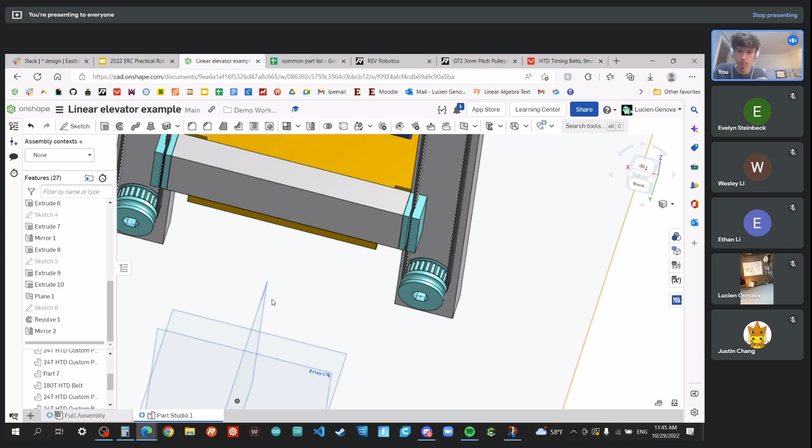And then we could make a little infinity belt. It would just look like woo woo. And then we'll have to make a motor mount offset from there. I'm going to open up MKCAD and we'll look at HD Hex.

So this has turned into a 2-hour meeting. I got nowhere to be, but here we go. Yeah, this has turned into a 2-hour meeting. I got nowhere to be, and hopefully this has been helpful. But

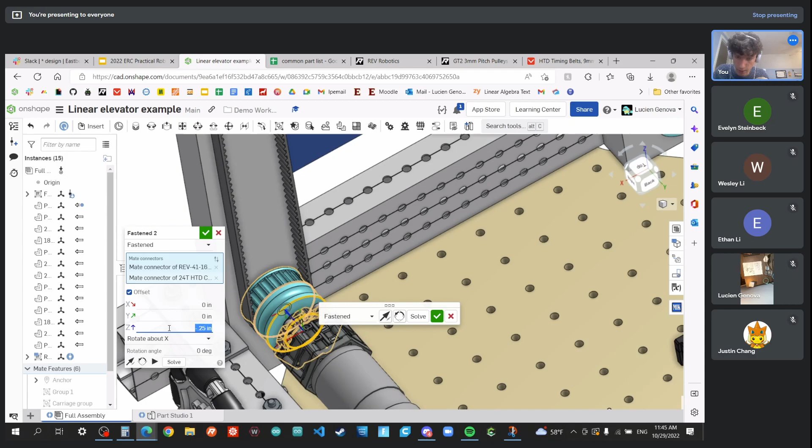I'm going to end the CAD process here. You would want to have probably a plan for how you would. I'm gonna offset this by like that much, just enough for a mounting plate. And then what you'd probably do is you'd bolt this pulley on here, and then you would have just this pulley free spinning on a shaft, and then you don't really need to worry about any sort of hex shafts because the hex shafts aren't ever driving the pulleys.

It's this motor. You'd probably want to make like a little plate that goes up to the belly pan down here, and that would mount the motor. And yeah, boom, you got your mechanism. And something like this for a wheel. This is what I was envisioning originally.

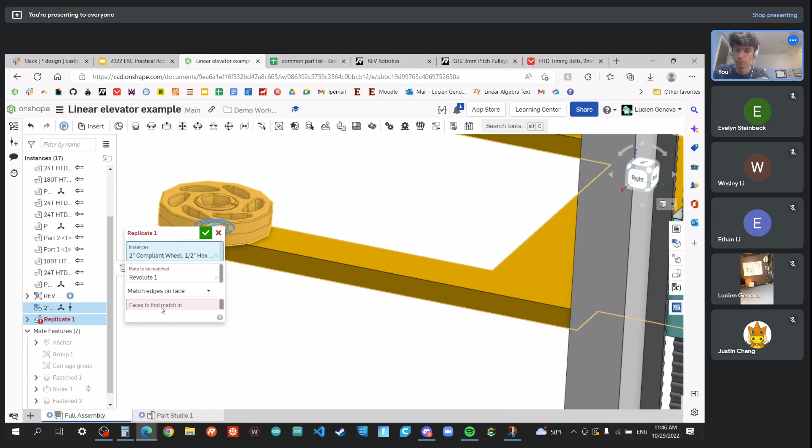I'm gonna fasten this here. Actually, I'll make it a revolute, just for funsies. And then what I can do is a replicate, and I can match edges on face. This face, and this face. And that'll put wheels all the places I want. And then I'd probably also want another motor, maybe up here.

And that motor might. Actually, tell you what, I think we should do the change configuration 90-degree output. That way we can lay it flat, and that way it'll package a little more cleanly. This 90-degree output costs money though, so you'd have to budget for that. This mechanism probably winds up being over budget, I gotta say. I mean, it's close, but like.

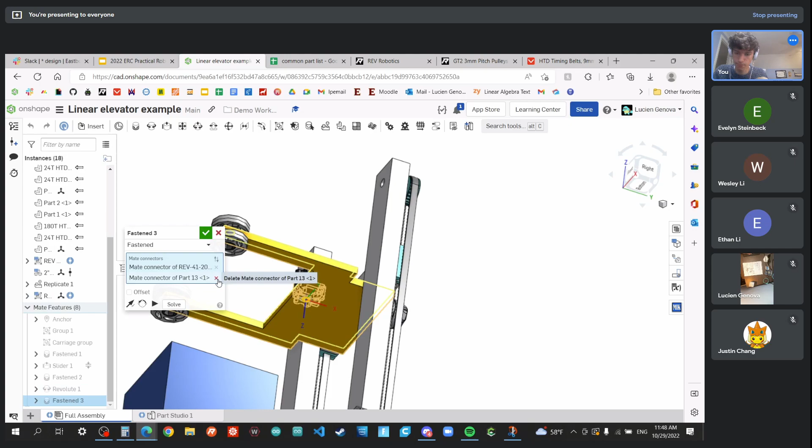Okay, so we should put this actually on the underside. This is just the center mate connector here. It's nothing fancy. Now this will also restrict how far down we can go. Not by that much though. But yeah, anyway. This is the mechanism. This motor would probably wind up spinning like a shaft, and you could have a chain going to this one, some sort of gear to reverse it, and chain going to the other wheel. It's a pretty simple design.

Okay, so actually I'll do one last little fun trick here. I'll play with my offsets so that it's like 5, and then -2. Sweet. Now it's got the cube. And probably if you were doing this, you might want like a limit switch or something back here so that the robot could sense when the cube is in it. But yeah, that's that.

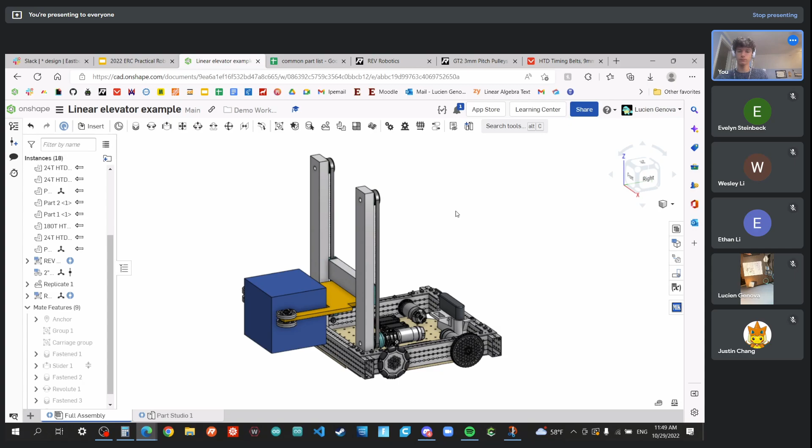I didn't know you can offset a mate connector. Oh, you didn't? Yeah, it's super nice.